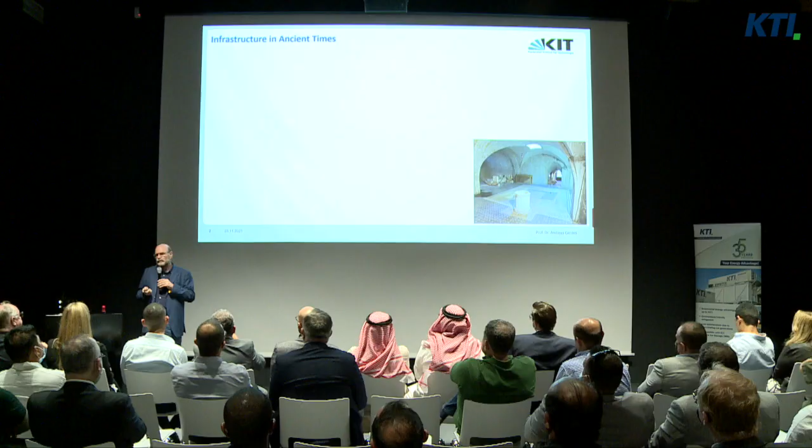This is an investigation we have done with archaeologists some years ago, and we investigated several cisterns in the region of the Mediterranean Sea, which are all 2,000 years old and older. And I was watching television, and I saw my colleague, an archaeologist from Tübingen, and he presented these cisterns and told us they are working still after 2,000 years. And I said, unbelievable. What is the reason for that?

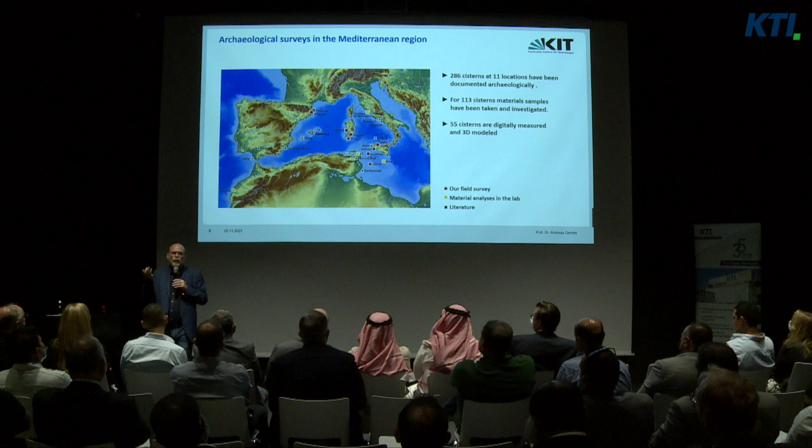But we know often these structures worked only for 10 years, made with the most modern materials we can use. And this worked for 2,000 years. What are the reasons? What can we learn from these experiences in the past?

And for that, we take a course on the Acropolis on Pantelleria. You can see 43 ancient cisterns, and they were made by the Phoenicians. They developed this technology, as I will show, and the Romans copied it later.

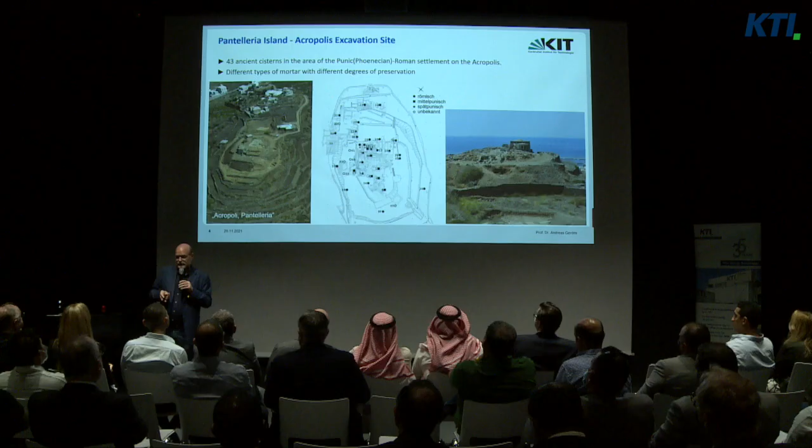If we have a look at the cisterns, you can see there's an excavation in this rock, and because this is a porous rock, it's necessary to put a mortar on the surface to prevent the outflow of the water. Now, please look to the left side, and you can see there are three layers.

It's interesting to learn the first one is made by the Phoenicians 2,000 years ago. The second one is also made by the Phoenicians, but it's a development. I talked already with some of you these last days and this afternoon - this is made using fly ash.

So this is not a new result of research. 2,000 years ago already, these raw materials were used - not ordinary Portland cement as one component, but lime and fly ashes. And these materials are so durable that it works until today.

And this is the technology made by the Romans. They had no idea at this time that it's possible to use fly ashes, volcanic ashes. Therefore, they transported from Sicilia to Pantelleria, a distance of 180 kilometers, these ceramic materials in order to create a mortar. But they had no idea that they could use the volcanic ash on the island, which is only 500 meters away from the Acropolis.

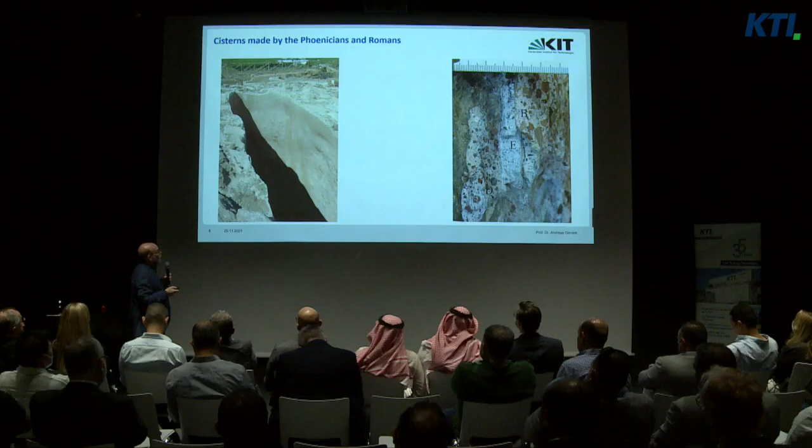And here we visited this cistern after 2,000 years for the first time, and it looks as if it was made a day before. Therefore, and this is a message of these experiences, it is possible to build durable structures using materials like concrete. We can do it.

And we can do it for a very, very long period if we know how it works and how to do it. Fortunately, a lot of experts in this room know how we have to do it, but we have to show, especially the customers, that it's necessary to use perfect concrete, high-performance concrete with high quality.

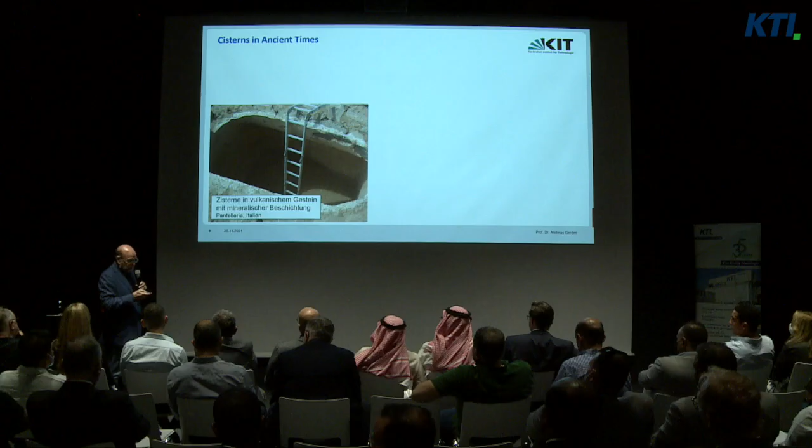Otherwise, it will not work and it will not survive 100 years. It will not survive 10 years. So now you remember, it's a secret. I have seen the movie and the television. I have no idea how it works, and therefore I'm a researcher, I'm a scientist. I try to clear up what is the reason for this high durability, and I will tell you the secret.

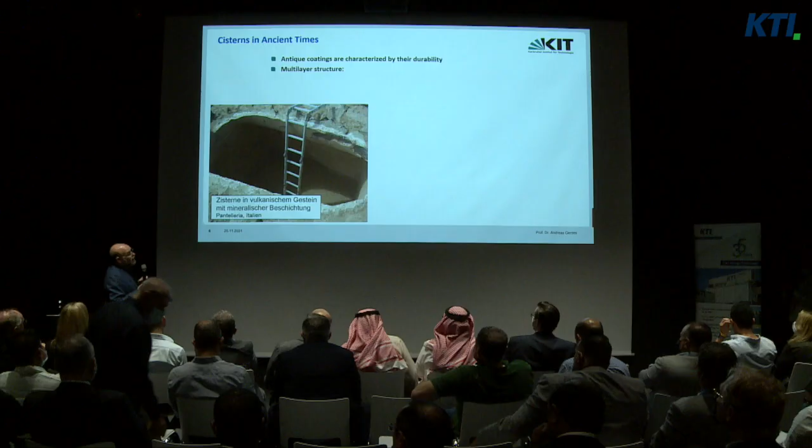We have a multi-layer structure: a first layer with a porous mineral-based mortar made with ceramic aggregates, and then on the first layer, a very thin layer is put on it. You can see it here - this is like a polished coat finish on this first porous coating layer.

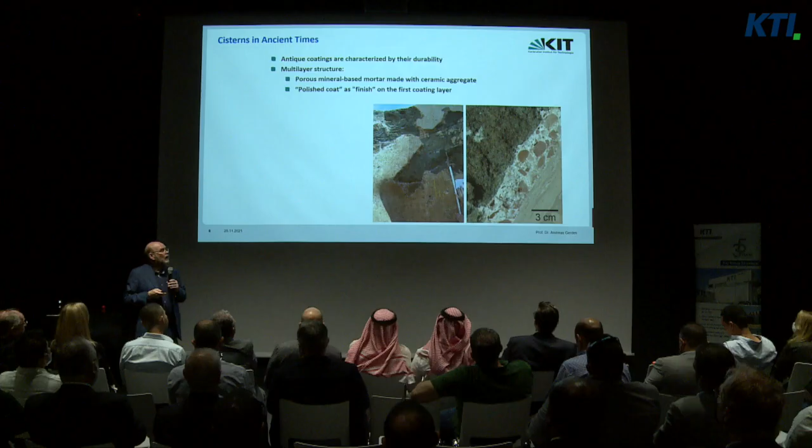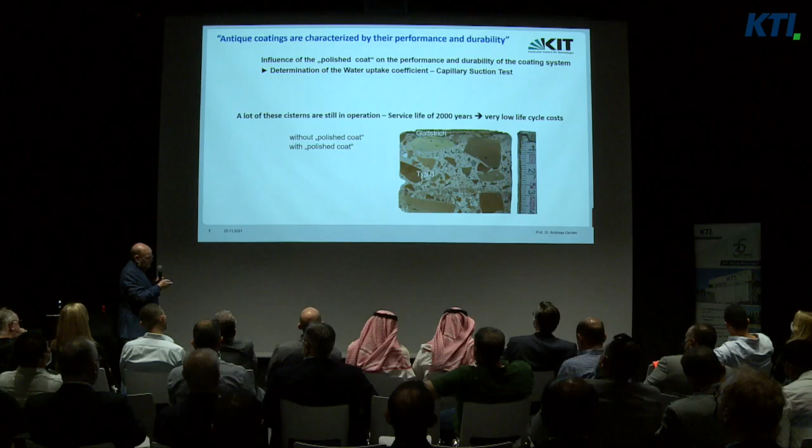And that leads - you can see it, this is a core from this material, the porous material and the polished finish. And we have tested the performance of this material. We have measured the water uptake coefficient, because you know if a material is porous, then materials can easily migrate - they migrate from the mortar into the drinking water, or vice versa, and that will lead finally to leaching which reduces the service life.

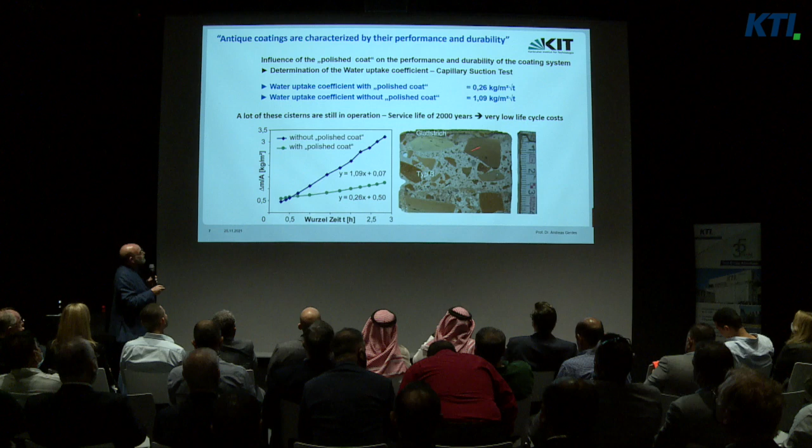And therefore we have tested the water uptake of the porous material, blue colored, so it has a high water uptake, but this polished coat has a low uptake. And this is the solution - that's the reason for the high durability.

Because if you have a new cement-based material like a mortar or concrete, this layer or this part of our concrete will be porous, so we have there a high water uptake, and the rest of the concrete will have a low water uptake. So it's quite the opposite compared to the old system.

But this is the reason for the high durability, because due to the dense pore structure, there's only a low transport of calcium out into the drinking water, and what is lost can be transported in the cover concrete, and therefore we can stabilize this very thin layer, and that leads to the high durability.

So what we have done in cooperation with a small company, we developed this system with new raw materials, and now it's one of the best water reservoir coatings in Germany, because the durability is comparable with the durability of these ancient systems - only due to the opposite porosity profile. That's the reason for that. Very simple.

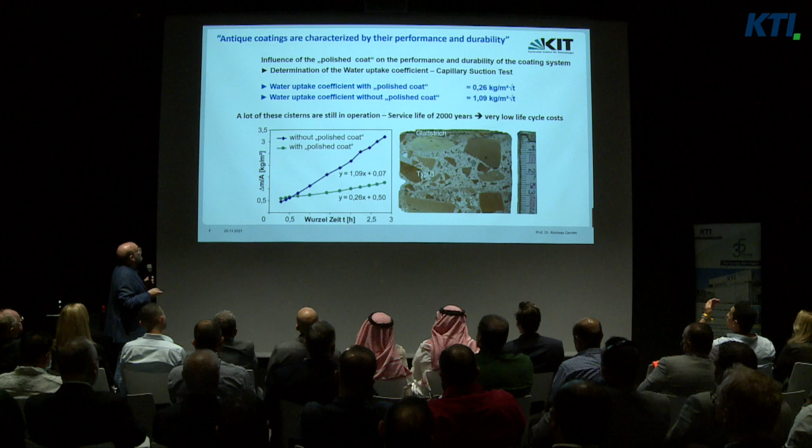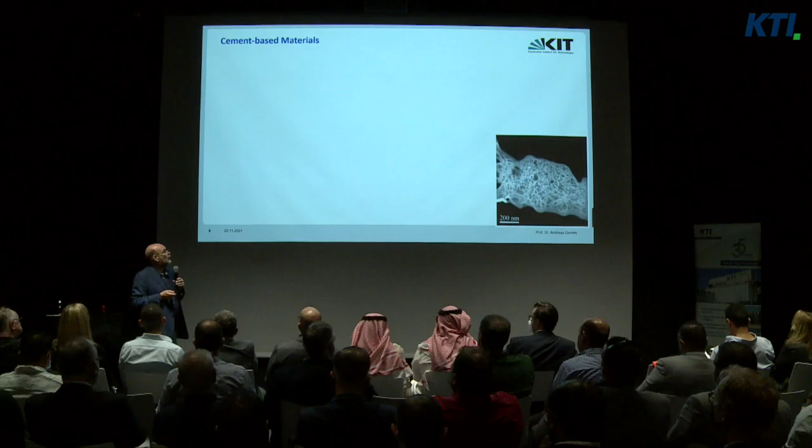So now we have learned already that cement-based materials are porous. And we are often talking in our business about strength. This is the most important factor. But this is not really important for durability, the strength. There are other factors we have to take into account.

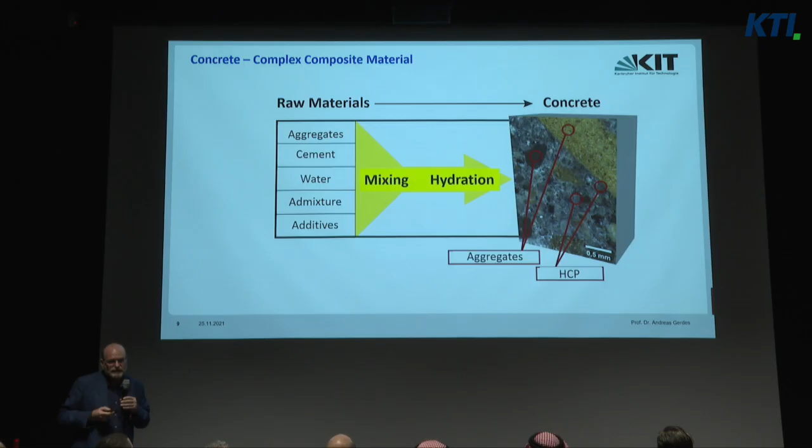Unfortunately we are making it complex, because it's really complex to create a high-performance concrete. It's not so simple, but it looks simple. This is a major problem in our business. We have aggregates, cement, water, admixture. We are mixing that, the hydration of cement started, and then we get this complex composite material.

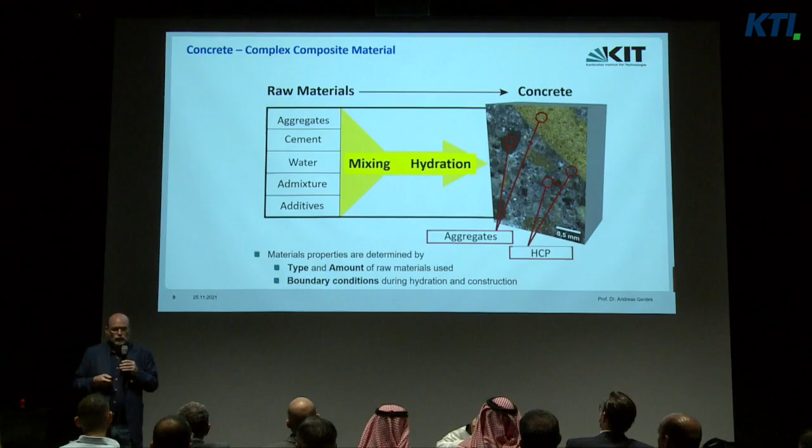However, so far we do not really know all the chemical reactions taking place during the hydration of the cement. But these hydration reactions determine the performance of the concrete, because the type and amount of raw materials used will influence the composition of this material. And the boundary conditions, like hydration or the construction phase, will also influence the performance of this material. But it's important to know the durability depends on the pore structure and the chemical reactivity.

So what we have done some years ago, we use cement, put it in a chemical reactor and produce organic compounds in a better way than a classical chemical process. Because this cement works in two ways: first, it collects the water, and second, we have a high pH. So we get a better result at the end of this technical process compared to classical approaches. So you can use cement for a lot of different things, but you have to take into account the pore structure, and the chemical reactivity is decisive for the performance and finally for the durability of the structures.

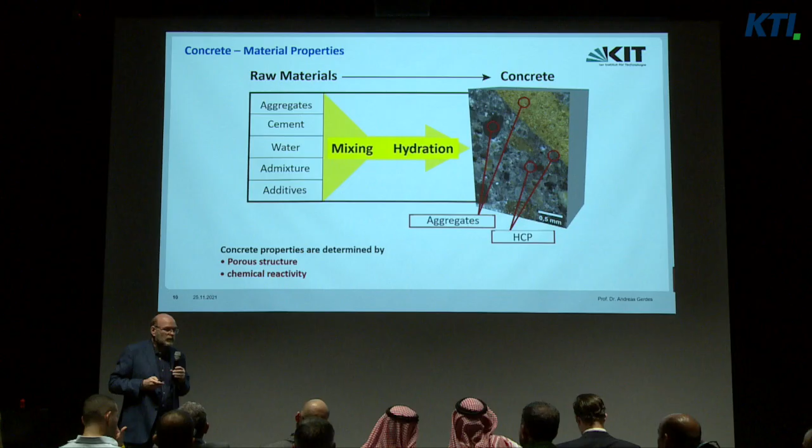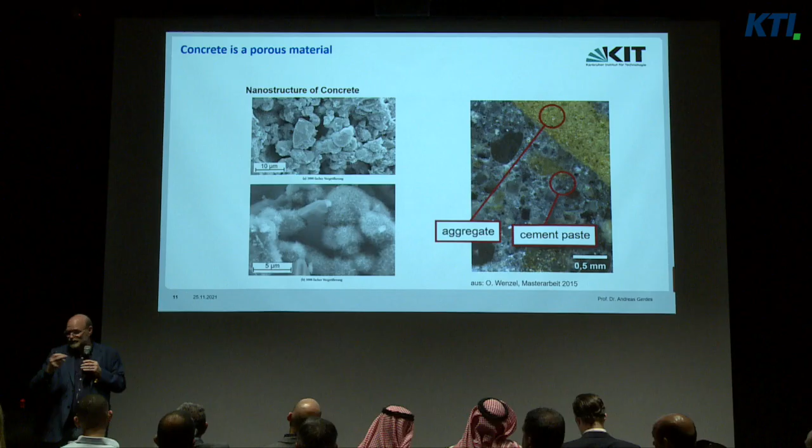And it's nice also to know, I think for Mrs. Blairsch and Mr. Blairsch, this is strongly influenced by the temperature. If you have higher temperatures, these needles will be shorter than at lower temperatures, and that has a strong influence on the performance of the concrete. So it's not only necessary to reduce the temperature for workability or to prevent cracks - it's also important for the quality of the concrete itself.

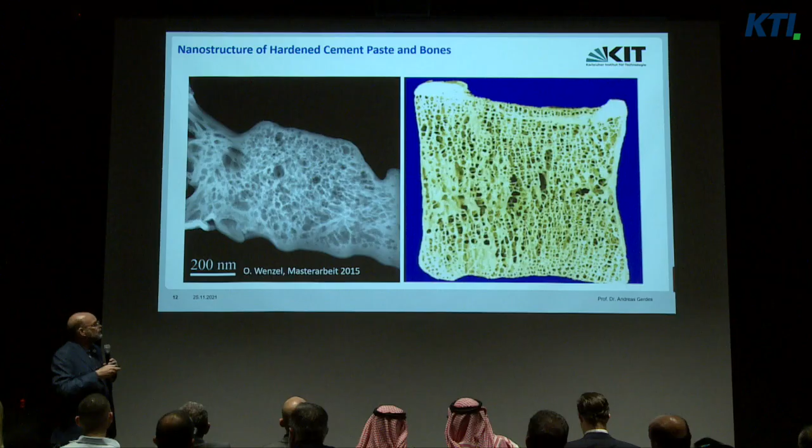And if we have a look at the next image, these are at 200 nanometers magnification. This is the cement-based material I showed in the figures before. And if you compare it to that, this is a bone. So that means the porous structure of a bone is very similar to the porous structure of our cement-based material. And that's the reason why we have to take care not to damage the bones of our concrete structures.

And that can be a result - you can see here, this is a serious problem. I'm sure you know this chemical reaction, it's called alkali-silica reaction, and this alkali-silica reaction leads to the complete damage of the cement-based material, forming these cracks. And this is, for example, a serious problem at most airports around the world.

And this depends not on the strength - it depends on the nanostructure and chemical reactivity of our hardened cement paste. And both depend on the concrete composition, and this is the most important point, on the workmanship. Because if you prepare the perfect concrete but there's nobody on the construction site who can apply this material in the right way, then of course the best concrete in the world doesn't work.

So therefore it's necessary not only to control the concrete, but also to control the construction itself, making a quality control. Please remember, we are paying sometimes millions of dollars for one construction. But if you ask the planner how much money you will spend for quality control - no money, $0. And will you accept a car without any quality control? Never will you accept it, and your cars are expensive, I know, I see these cars.

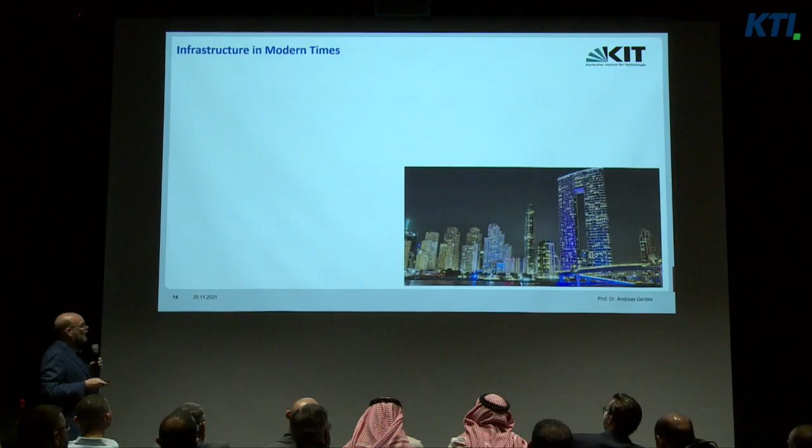Therefore, our first goal must be to protect our infrastructure in modern times. And now I will give you some numbers. These numbers are given by the McKinsey consulting company.

They made a really interesting study some years ago, and in the time from 2013 to 2030, 40 trillion euros will be invested worldwide in infrastructure. This is the biggest market in the world, period.

That means every year, $4 to $5 trillion in investment. Do we have an idea about the investment in the automotive industry? More or less than 4 trillion euros or dollars? It's only $1 trillion. So that means the investment in infrastructure construction is 4 to 5 times higher compared to the worldwide automotive industry.

This will be our business in the next decades around the world. This is a bad number. We have to change something.

And I had a nice talk with one of my colleagues from Germany. He lived near my hometown in Germany, and he was talking about digitalization in the construction sector.

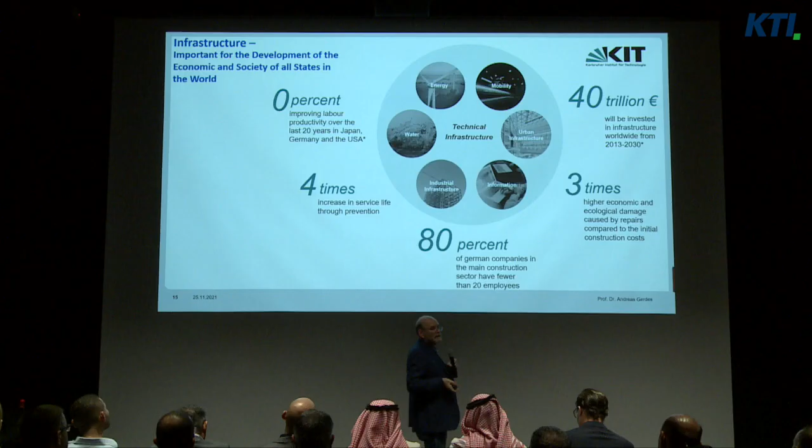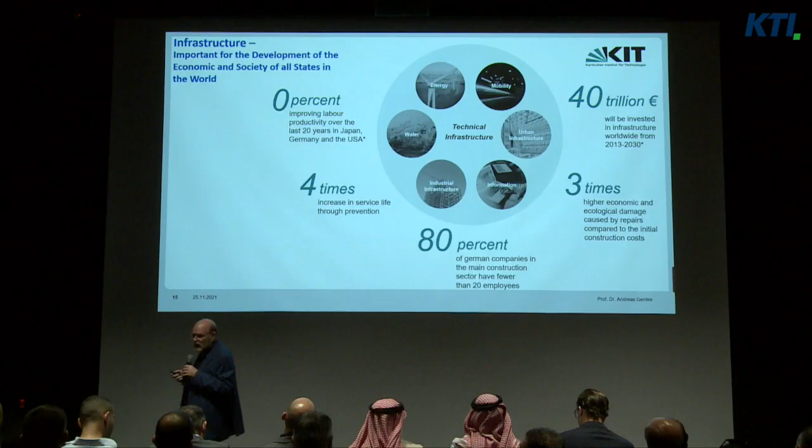Water supply and sewage water plants, and finally, of course, energy. These are the different parts of infrastructure, and there is one point which is common for all of these, and this is concrete. Because for the erection of all these structures, it's necessary to have good concrete and to prepare our structures with this concrete. So now, how can we extend the service life?

And this is what we call prevention in construction. I will show you later some activities, how you can do it in practice.

And we can extend the service life by 4 times. The price for that is approximately 3 to 5% of the initial construction costs. So you will not pay 100%, you will pay 104%, and then you will not get 25 years, but you will get 100 years service life.

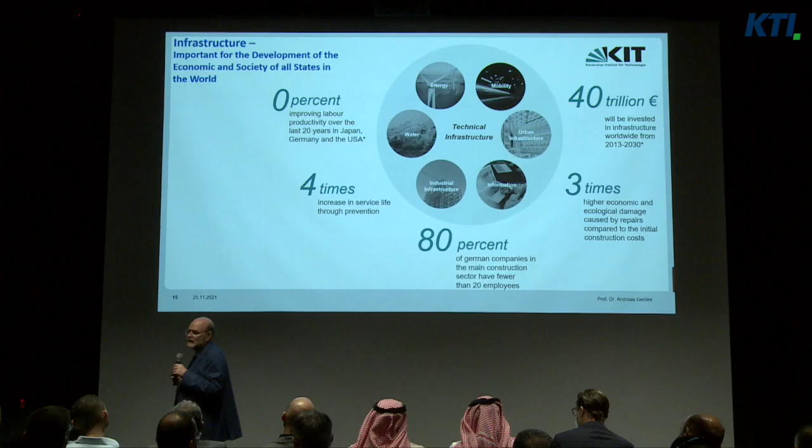That's a good business, isn't it? Yeah, because we can reduce drastically the service life costs. And this is not the only advantage of this strategy, because we can also reduce the environmental impact, we can improve the CO2 footprint of our structure, very simply and very soon.

This is our work, what we will do in Karlsruhe in our research and development, because sustainable development goals means sustainable infrastructure. We can't do it without this infrastructure, because clean energy is impossible without infrastructure. Industry, innovation and infrastructure, already named. Sustainable cities and communities, impossible without durable infrastructure. Clean water and sanitation - these are all goals of the United Nations, and we can only reach them with high-performance infrastructure.

However, we already face a lot of problems in this business. And the first problem is climate change. I'll show you the airport of Leipzig, and this is really a huge airport, so that we have 700 kilometers of joints at this airport. And every year, 100 kilometers must be repaired, due to the fact that these materials are not made for the higher temperatures in Germany.

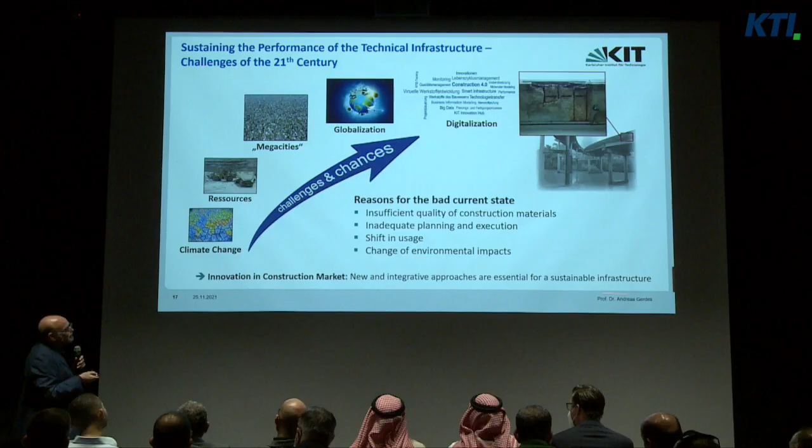And that's what we are doing at the KIT Innovation Hub in Karlsruhe. This is the Institute of Functional Interfaces, our working rooms, in which we are sitting together with all stakeholders along the supply chain, beginning from raw material suppliers like BASF or other huge chemical companies, cement producers, concrete producers, up to the public owner. And we are sitting around the table talking about what will happen in the near future.

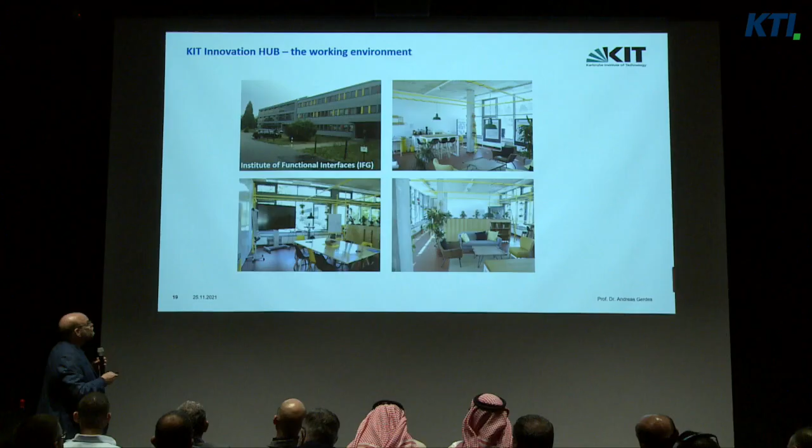What do we have, what are our challenges? We have to do it together. We have to talk in one group to identify these problems. And that's what we are doing here with a team of approximately 20 experts working in this field. You're all invited to come to us and visit us if you're interested.

So, what is happening right now in the construction sector? We have a huge transformation in the construction sector in Europe right now.

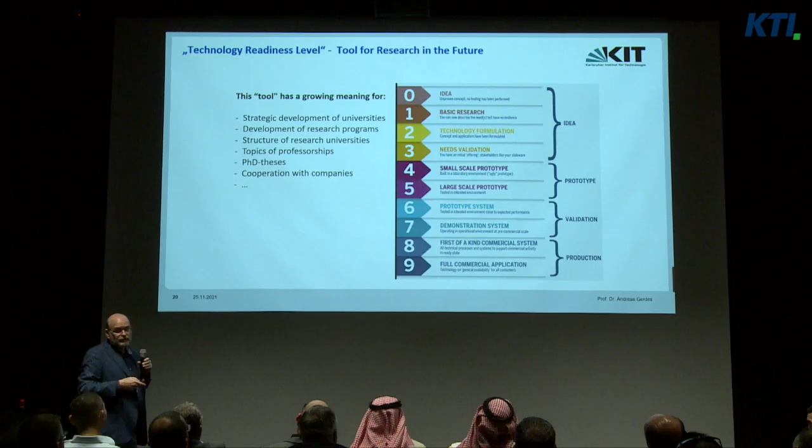But we need these steps between both, idea and application. Then we will be able to do a technology transfer which is very fast and very successful. That's what we have introduced into the construction market. We started at basic research, applied research, and technology transfer into the market. That's how we do it.

We are doing basic research at the KIT, applied research at the University of Applied Science, and in a company I founded some years ago, we started to transfer these ideas and products to practice. The basic idea is to parallelize this project, because today we have on one location the basic group research, the applied group research, and the technology transfer experts.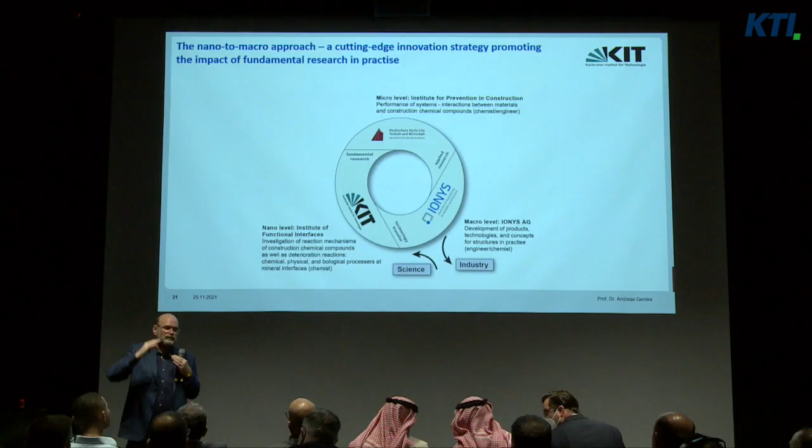But they never talk with each other, and there it's difficult to make the technology transfer. In my group, I have three groups in the company in order to collaborate with each of the other groups. So in this way we can parallelize the technology development process and reduce the time to half. We accelerate this process and got very strong patents. So normally you need 10 years, we need 4 years, in some cases only 1 year to create new products.

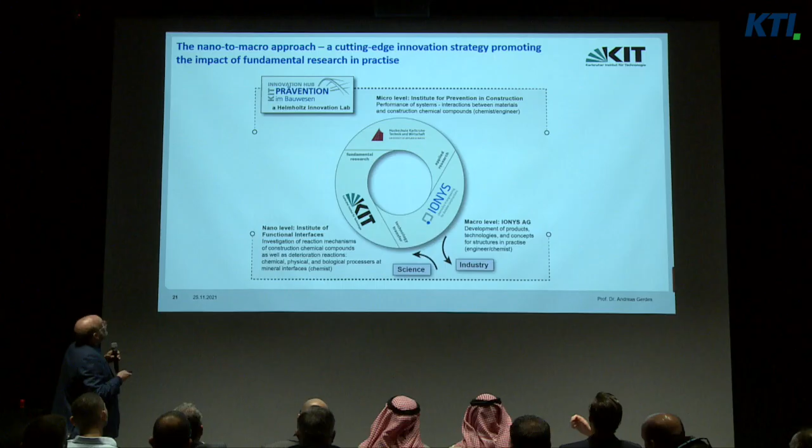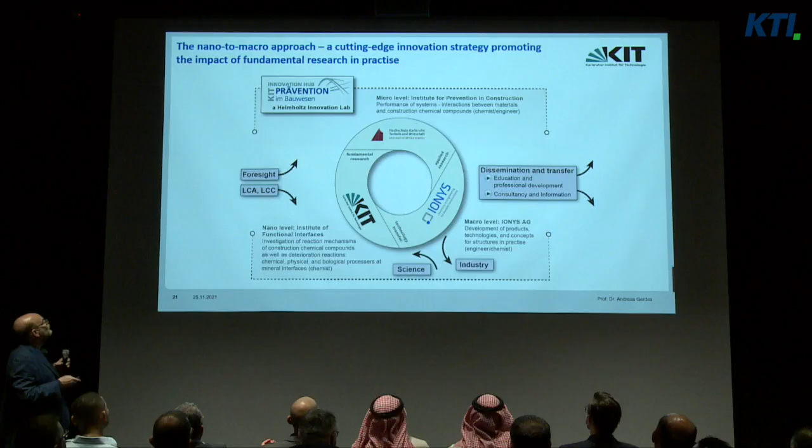The next step is innovation hub Prevention in Construction to transfer and disseminate these results to the public owner. We are doing consultancy and information. But this is located at a university, not in a company. It's a company and a university branch at the same time. This is the basic idea.

What we are doing, we are foresight innovation communities. I mentioned it already. We're sitting together and looking to see future things. We manage new things in order to translate technical results into economic processes. We are sharing with colleagues around the world because the idea is to translate these problems into solutions. We are communicating these to the relevant groups. And of course we teach our students in this way to become better engineers after their study and to learn how they can protect our environment.

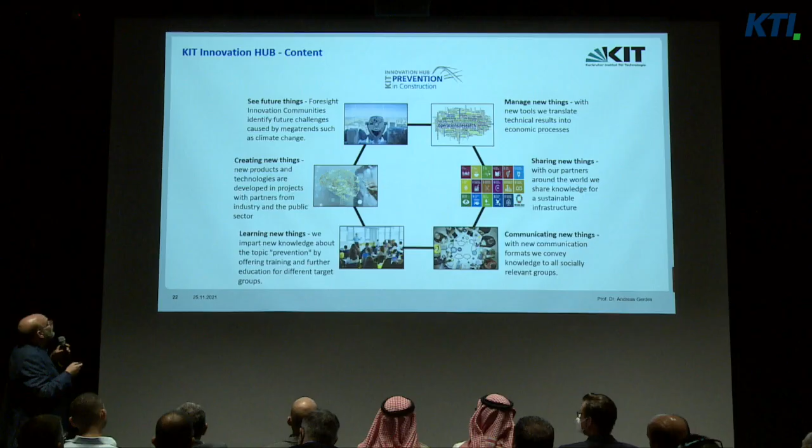And therefore we have developed our own innovation process, which leads to the product and to the knowledge, because both are necessary for our customers and the public owner to create sustainable infrastructure. We need both.

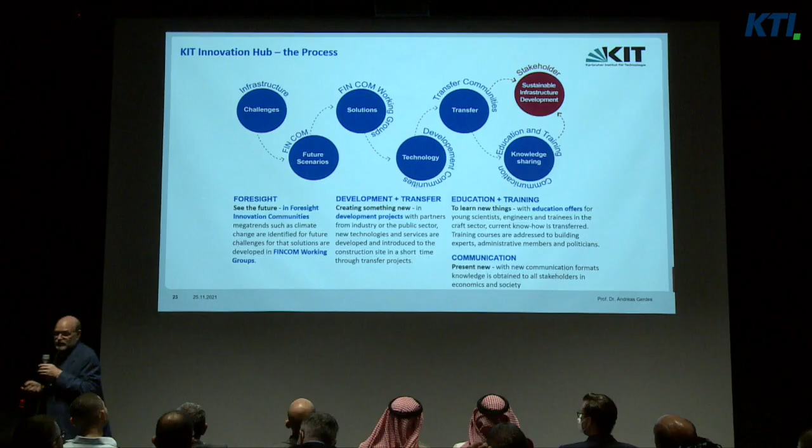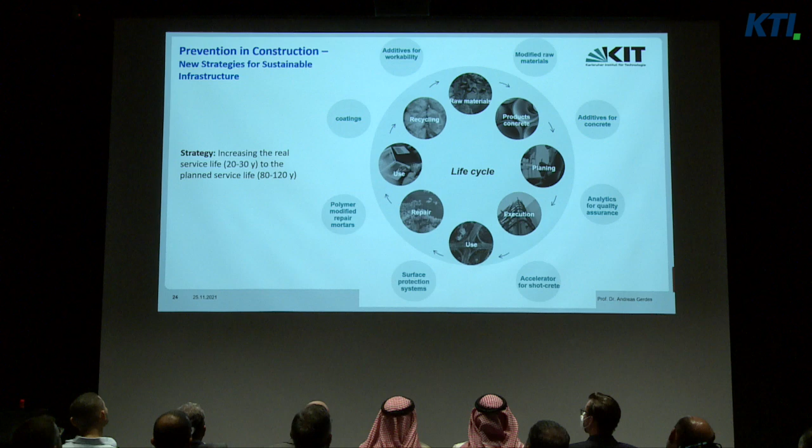So this is the basic idea: increasing the real service life of 20 to 30 years for new structures, but also for already existing structures, because this is very important. To wait until these structures collapse and then build a sustainable structure makes no sense - we'd have to wait 30 years. But in this way we can do it also with already existing structures to extend the service life.

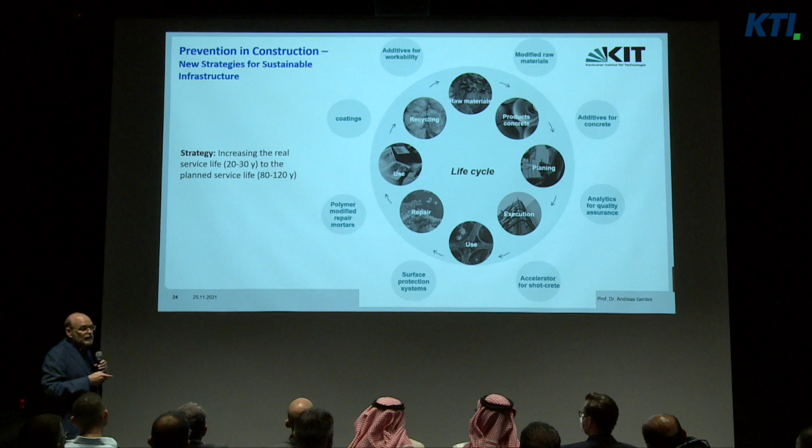And there are a lot of different tools we have developed during the last 10 years. I will show you now some examples for that: innovations and projects.

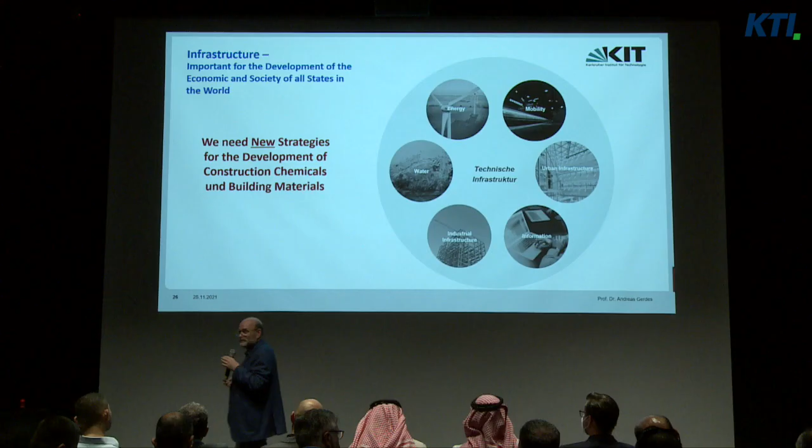First of all, we need new strategies. Most developments in our business are empirical - we prepare 100 mixes, test these mixes, and then we are satisfied or disappointed. Therefore, we have to do it the same way as, for example, the pharmaceutical industry has done for years, using high-tech tools like computer software. I will show it to you.

This is, for example, the strategy in pharmacy: target identification. This is the action of mRNA drugs for the vaccination against COVID. Then we are searching for suitable active agent molecules. We have just built special types of robots which will prepare one mix, and in the next step they will test it. So we are very fast to test our best ideas about new admixtures, for example. But computational chemistry is very important in drug development to create these molecules and to learn how we have to create the drugs, and so on.

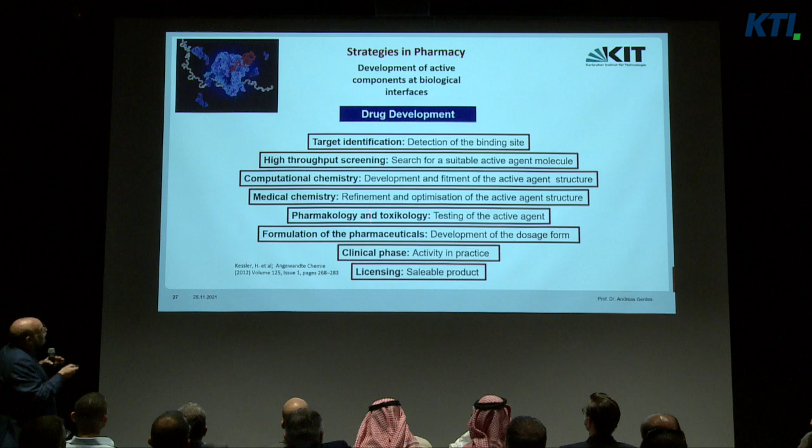This is a clear strategy. So when we transferred it to the construction sector, we are working like the pharmaceutical industry to create new additives. That's the basic idea. But we don't have to characterize the biomolecules in our body - we have to characterize mineral surfaces using sophisticated tools. I mentioned it already: we are using robots for the investigation of new mixtures. Then we are using computational chemistry to optimize, for example, the molecule of a superplasticizer, to improve the performance or to reduce the products.

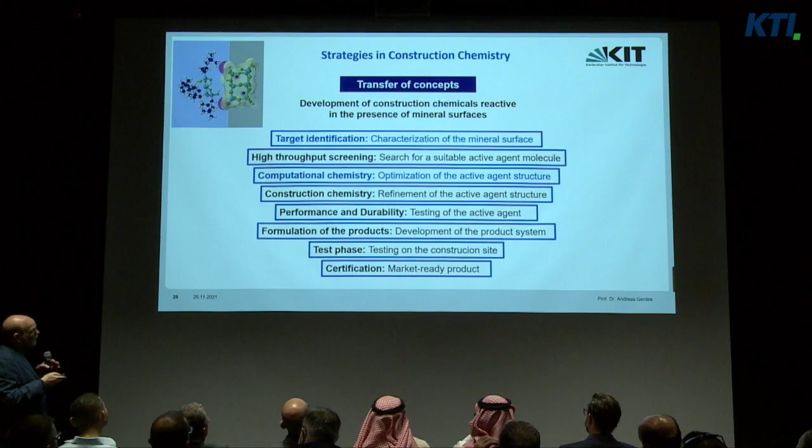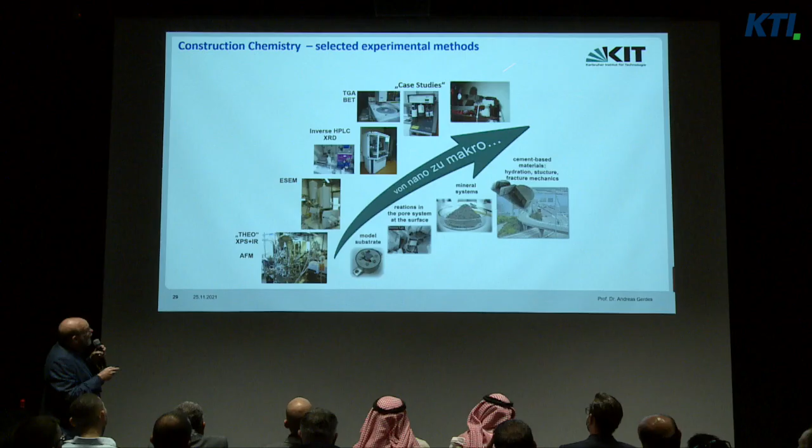Performance, formulation. This is a similar process for the transfer of basic research results to praxis. Here's a short overview of the technologies we use for that. These are all highly sophisticated analytical tools, starting from the molecular level up to the construction site. This is the basic idea, always.

And these are the selected methods for modeling: ab initio methods, density functional theory, and so on. We use these software tools to get information about the interactions between the chemical admixtures for concrete and the mineral-based systems. Now you are thinking, this is basic research.

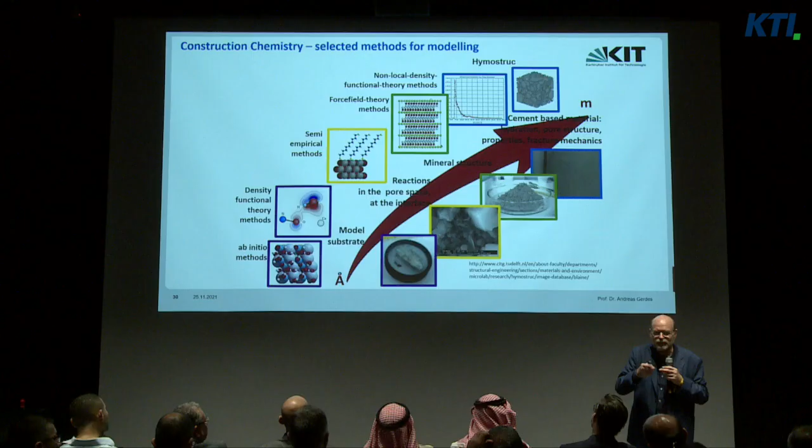I can never sell these products because I have to wait 25 years for the result. No, not true. I will show you one of the results of this work. This is a development of the company IONYS, an inhibitor for the prevention of alkali silica reaction.

This powder is a complex combination of a mineral carrier material, an active component which prevents the ASR reaction, and a coupling agent. In this way, we put the active agent on the surface of this mineral powder, and then we add this powder to dry mix systems.

For example, cement or other cement-based dry mixes. Then we add water, and in a determined process these substances are liberated, and the mineral substance works like microsilica, because it's a type of microsilica. So we have two actions: the action of the microsilica and the prevention of the ASR reaction.

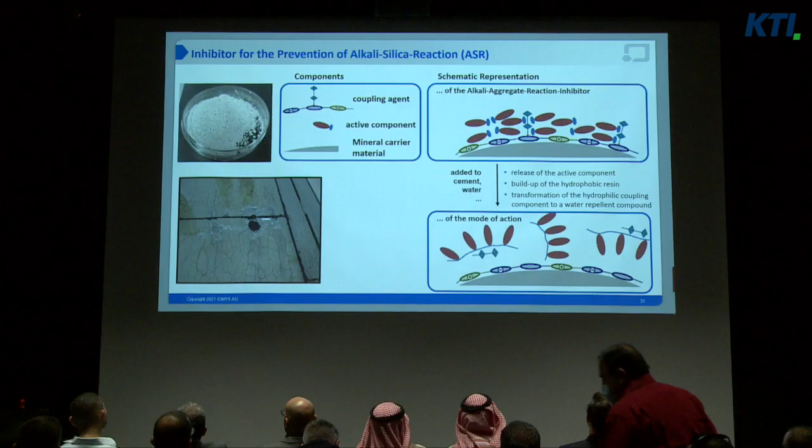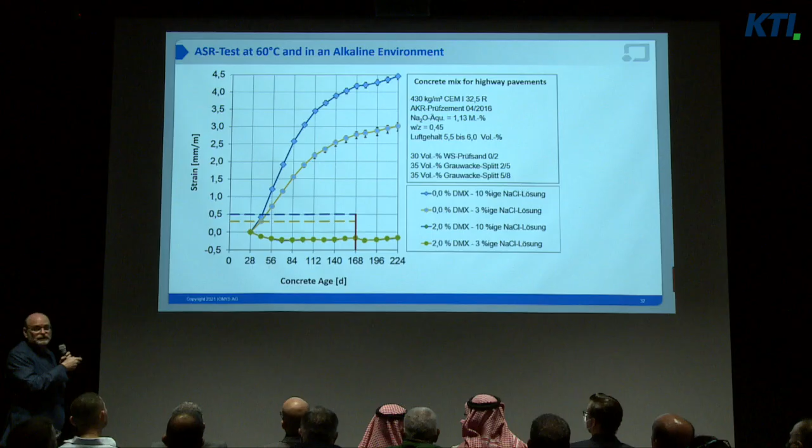Now you can see the application of this additive. There's no strain compared to this, and you only have to add 2% related to the cement weight. That's nothing in terms of weight, and it's also nothing in terms of money. But it leads to high resistance against these reactions.

And if I come back to the use of recycling materials in concrete, we can only use these recycling materials if they're contaminated, if we add something like that. This is the result of our work I showed before. We needed one year for the development of this product, and it's unique in its performance and in its application.

This I mentioned already, I will come to the end. This is the protection of the concrete of these airfields against ASR using a hydrophobic silane-based agent to prevent the absorption of aqueous solutions of de-icing agents. We did it some years ago, and it works very well up to now. I think it will work for the next 20 years, then we have to redo it.

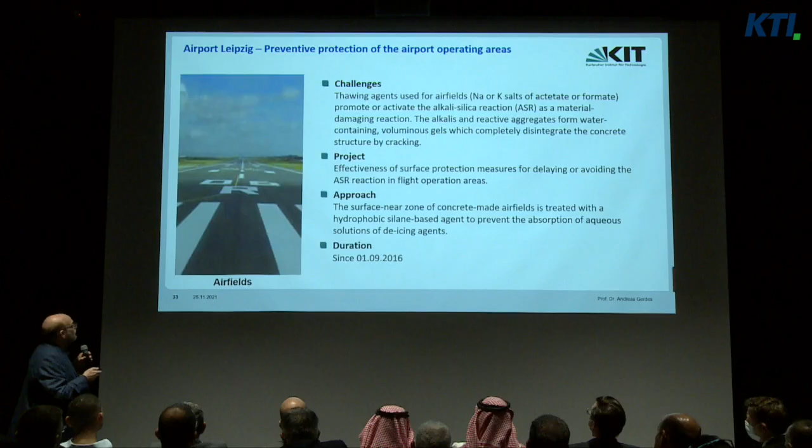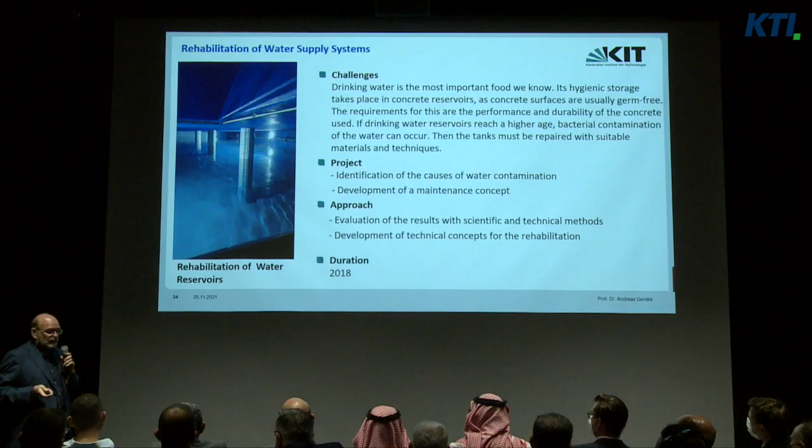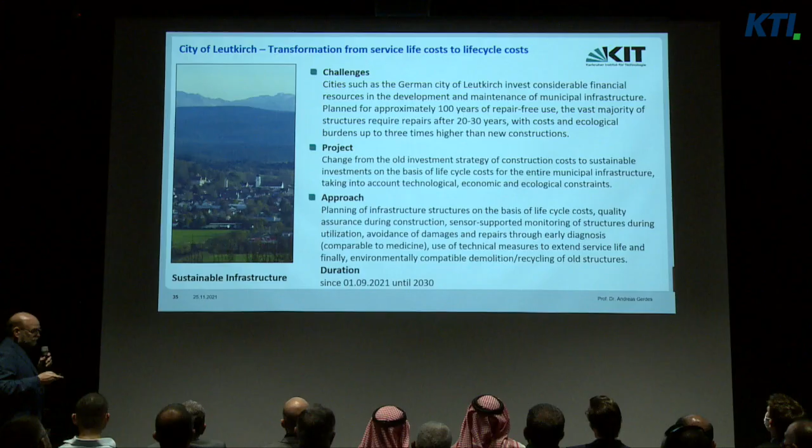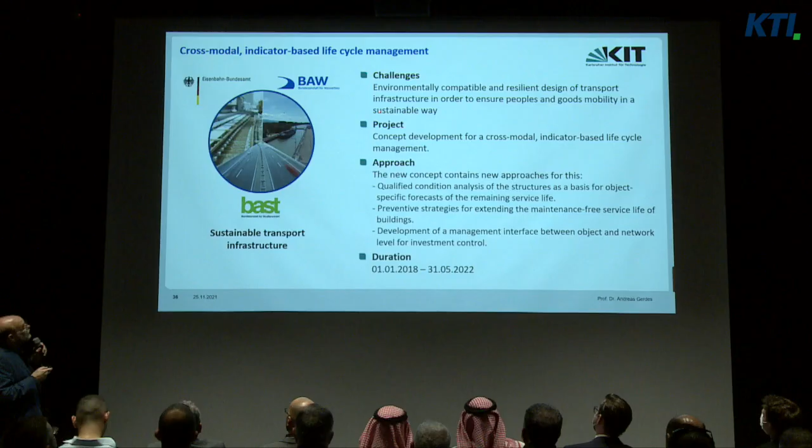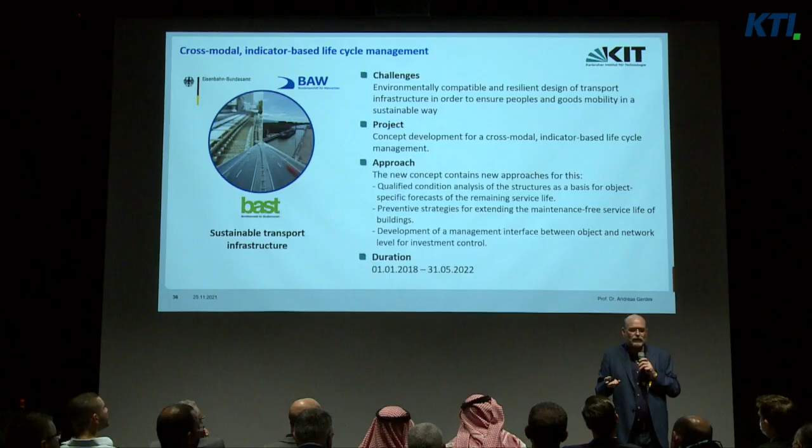This is another project we did for the German government because we have developed a cross-modal concept for railway, waterways, and highways, to get an environmentally compatible and resilient design of transport infrastructure. This is more or less a software approach we have developed so we can manage this type of infrastructure in a life cycle management concept, with one rule, one standard. Up to date, we have three standards for all, but it makes no sense, because in all cases we are using concrete, and the concrete is the most important factor for the durability and performance of these structures.

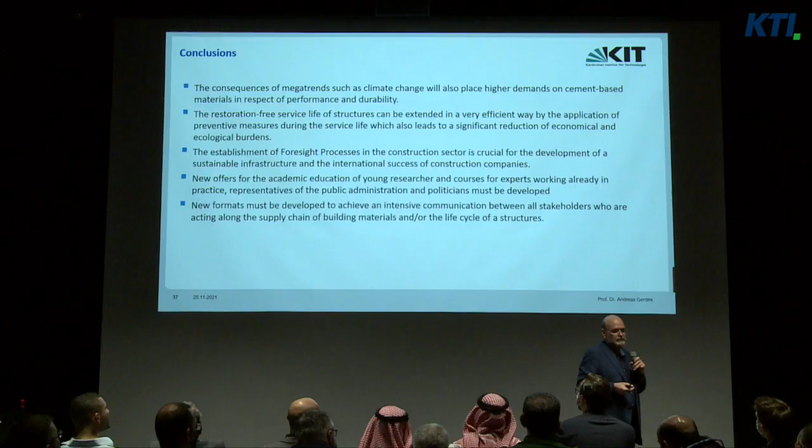So now I will come to the end of my presentation and my conclusions. I think first, the consequences of megatrends, such as climate change, will also place higher demands on cement-based materials in respect of performance and durability. That will be our job to do for our customers. It's hard work, but we have to do it.

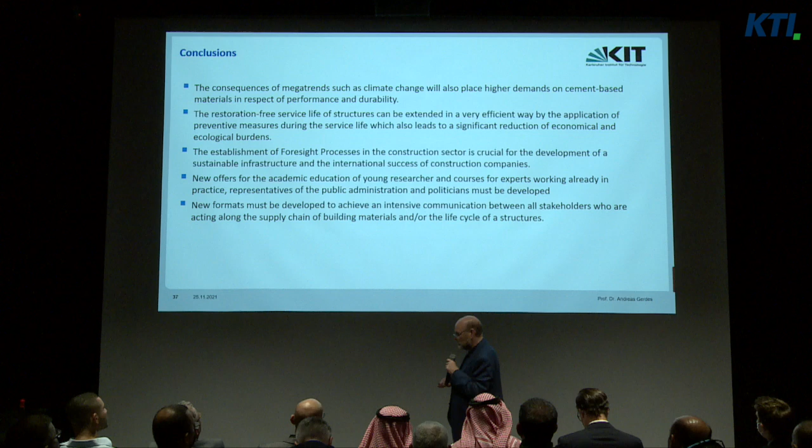The restoration-free service life of structures can be extended in an efficient way by the application of preventive measures during the service life, which also leads to a significant reduction in economic and ecological burdens. This is a change in mind that is necessary, not a change in our tools. We already have these tools.

In the construction sector, we are only talking about the next day. Unbelievable — we are constructing infrastructure for a service life of 100 years, so we have to take into account today what will happen during the next decades in our plans and activities. Therefore we need foresight processes. Your new car is already being planned in Stuttgart by Daimler-Benz. They are thinking now about what will be interesting for you to have in your car in 10 years. But we are not thinking about what will happen in 20 years with our structures. So we have to do the same job as the automotive industry.

And we need new offers for education. We have a lot of civil engineers in our business, good economists in our business, but we also need good material scientists, chemists, and so on. This is really rare — I'm always looking for a colleague who is also a chemist, and it's not often the case that I find someone.

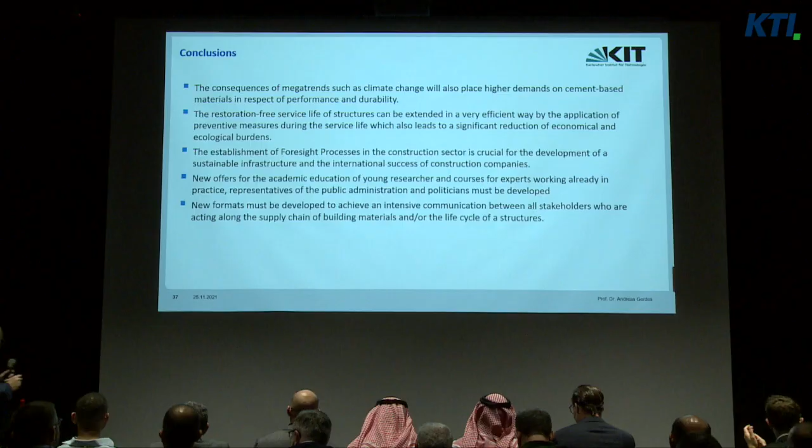Well, I could listen to you longer than these 45 minutes now. I was hoping you'd speak for maybe half an hour more, because you have so much experience in your lifetime, and I think we should all be grateful to share this knowledge. Personally, I was only looking at concrete and ice and cooling, but there's so much more involved. He might have told you a few things you didn't know yet. It's a fascinating job, and I wish I could stay in the business a little bit longer than 10 years, but sooner or later you have to get out.

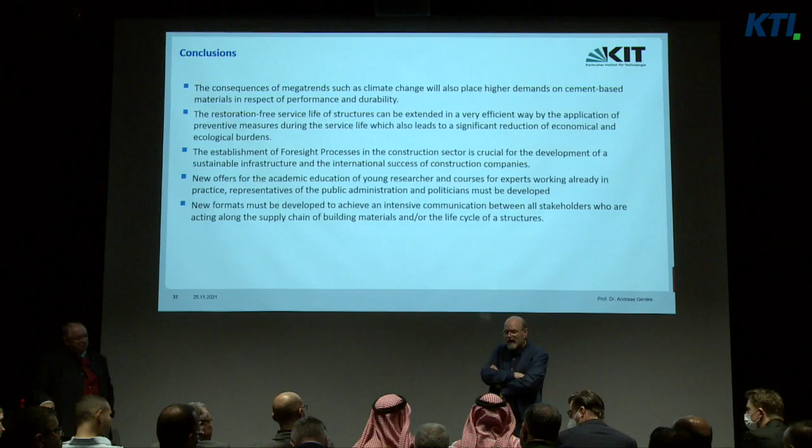By adding additives to the cement, to what extent can we increase the service life? For example, if you use this new type of development I showed you, we can extend it from maybe 10 or 15 years to 60 to 70 years. If we use, for example, the water repellent treatment for harbors, because there we have a high impact of chlorides, we can extend it to 100 years. Normally after 15 years you have a lot of concrete damage and you have to repair it, so it depends on the grade or severity of the impact.

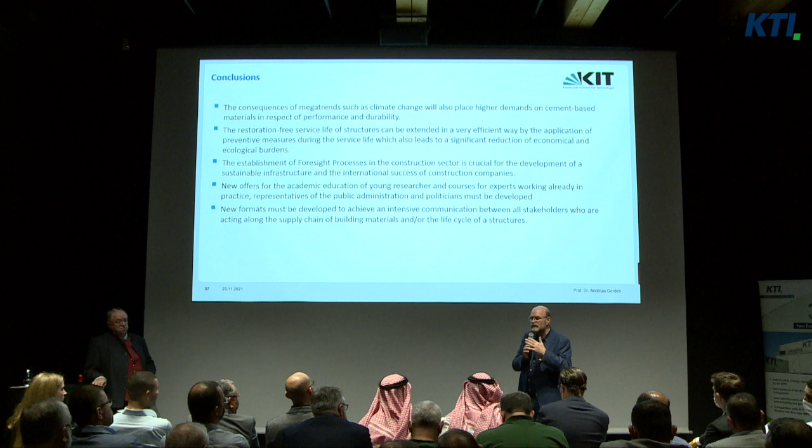But I think that's our idea: we can extend it in all cases to 100 years if we take this process into account at the beginning of the planning. It's a special type — you have a concrete consultant and so on, but we also need a durability consultant who tells the planners what to do to get the best results, such as these admixtures.

Up to what extent are the rules matured in Europe, for example, to ask for guarantees up to 60 years, or to make a new city as an example based on the life cycle, which is the opposite approach? So up to what extent are the rules matured now?

First of all, the guarantee in Germany for a new construction is 5 years. That's nothing compared to a planned service life of 100 years. That's like, for example, for a watch, a 6-week guarantee. It makes no sense.

On the other hand, all of these things we have developed follow the rules. We are not working against the rules. There's enough space in the rules to realize it without any trouble. That was the reason why it was so simple to convince the public owners to change their strategy, to change their working, because they are not in trouble, because they are still using the standards and rules.

I think there is intensive work that should be taken with the stakeholders to develop the rules to be matured enough with these technologies. You are right, but you sometimes spend 10 to 15 years to modify the rules, and that is our major problem. That was the reason why I changed my personal strategy 5, 6 years ago.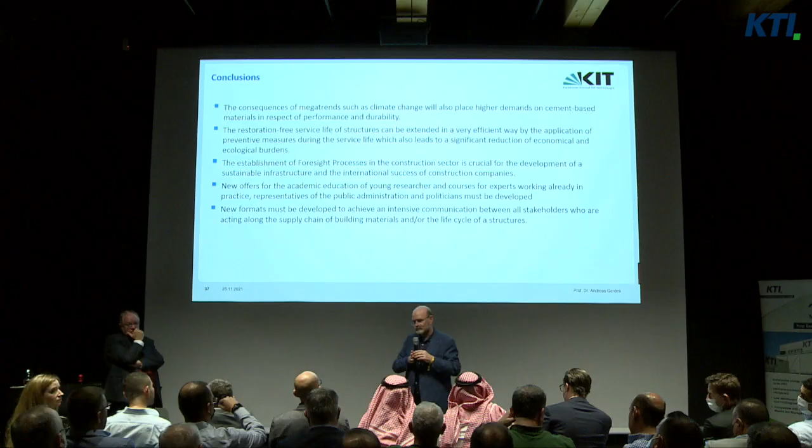Can you please share with us how will you assess or test the durability for 100 years? Is it using curing chambers with different temperatures? How can you assess it?

It's often difficult to make experiments in a laboratory to get information on how long it will work. That's why we use these highly sophisticated tools to build models, because with these models we can calculate what will happen, since we understand the mechanisms.

That will be combined with experiments in the laboratory. For example, a very powerful but simple method is measuring the capillary uptake of water, and then we compare it. Or we use IR spectroscopy to characterize the amount of silane which penetrates into the concrete. We also use electron microscopy.

There are a lot of tools usually used, but first we think about how we can show the performance of the material and its alteration, and then we start to investigate. We also go outside looking for old examples, like the cisterns on Pantelleria, to learn about the physical and chemical basics of this behavior. This is our treasure: to know these interactions and what are the important factors which influence long-term performance.

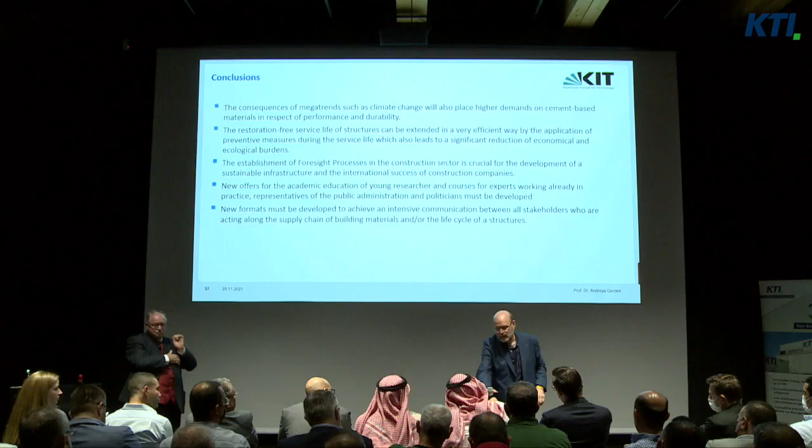So I can do it, because I will not live 100 years, so it's no problem to do it.

What we are doing, and this is also important, is that after treatment we make a quality control. As I mentioned, we have no quality control concepts in the market currently. Unbelievable - we are paying hundreds of millions of euros for our construction, but nobody will pay five dollars for the quality control.

That's, sorry, but I come from the northwestern part of Germany. We say what we are thinking, and I think that's stupid. That's really stupid.

So we can do it: we make the quality control, maybe directly after application, and 10 years later we do it again. Then we can observe how the performance of this treatment is. If it's good, okay, we continue 10 more years. If it's not good, we do it again and protect it again. So it's important to have observation along the service life.

Because up to now, what is the test? In Germany, every 5 years the bridges are checked. It's also stupid, because we only get information about that day. We don't know if the chloride front is only 1 millimeter or 1 centimeter away from the reinforcement.

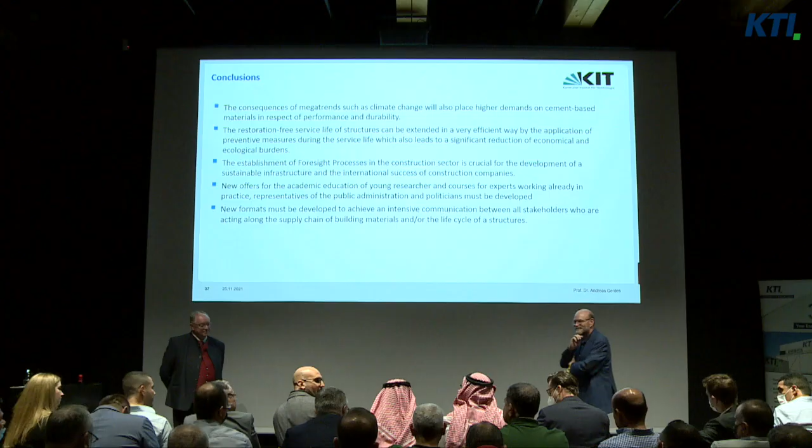Thank you. Dr. Hashim is my colleague, and I have paid him to say that. Okay, if there are no further questions, I say again, thank you.